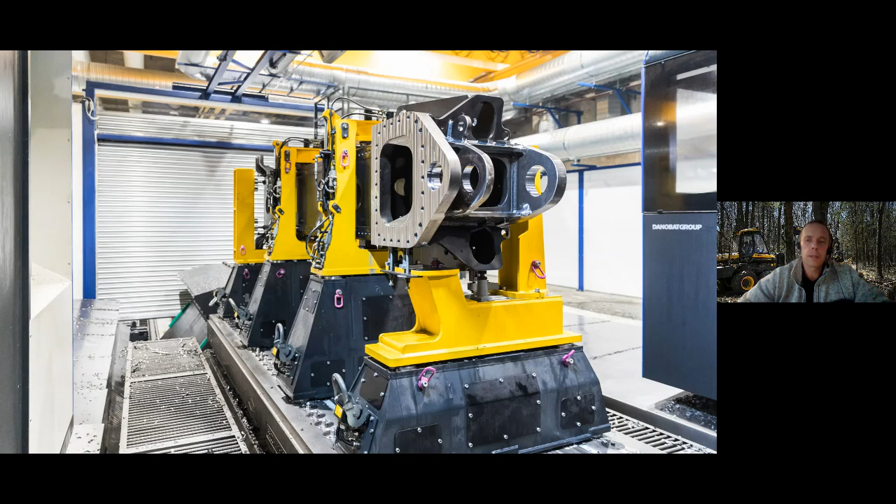Here are some pictures. Like I said, we do make a big part of the machine in-house, and for example all the frames of the machines, cranes, and harvester heads, these big parts of the machine we make ourselves. After robot welding, all these components are machined, so that the quality is extremely good for the customers' use in the world.

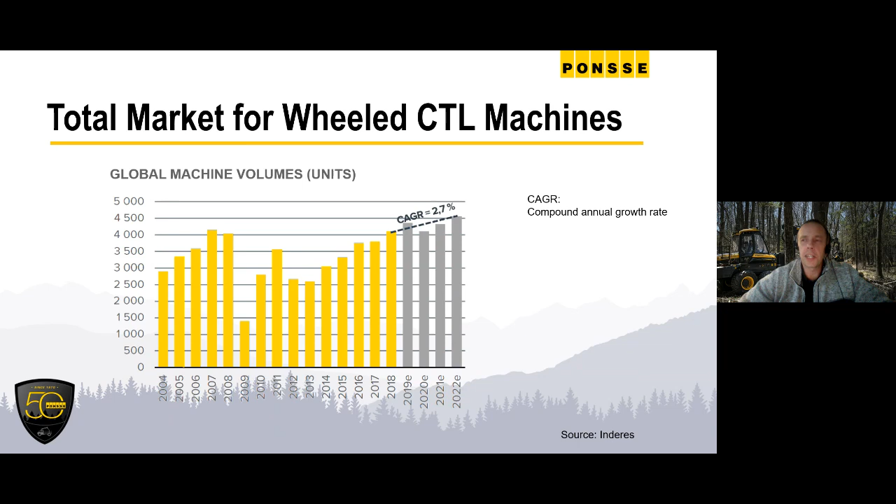Then a little bit about the cut to length machines and the market globally. Here's a little chart about how the volumes go, and we can see the trend has been that the total market for CTL machines has been growing, and we can see that trend also for the future. Of course this year we have a little gap, a little drop, because of this pandemic situation in the world. But overall we can see that these wheeled CTL machines are growing, and Mr. Antti Räsänen will soon tell a little bit more about why that is.

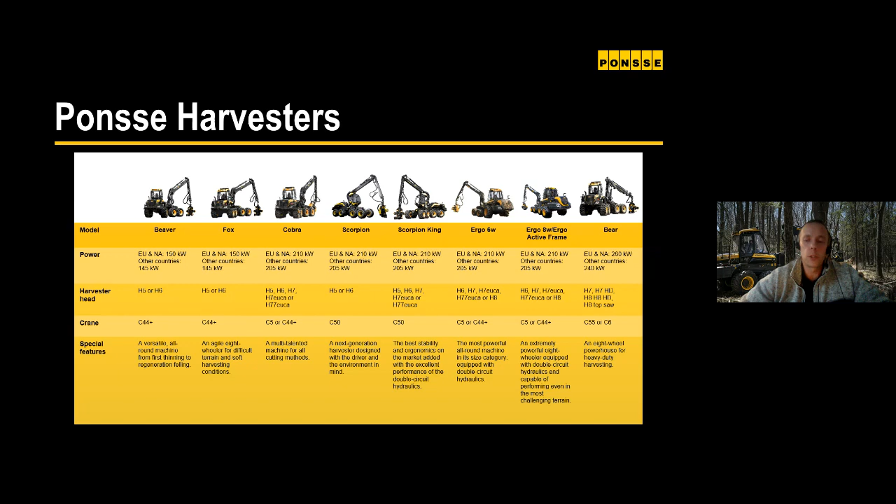I will not go through these too deeply, but just to give you an idea of what kind of products we have and are selling. From the harvester side, our product models start from the 6-wheel Beaver for thinning sites, all the way to the Bear harvester, the 8-wheel Bear harvester for the very demanding clear fellings. So we do have a very, very good product portfolio with the harvesters.

Same thing with the forwarders, so from the Wisent forwarder, the 12-ton forwarder, all the way to the 20-ton Elephant King, and also the Buffalo Dual is one of our products there.

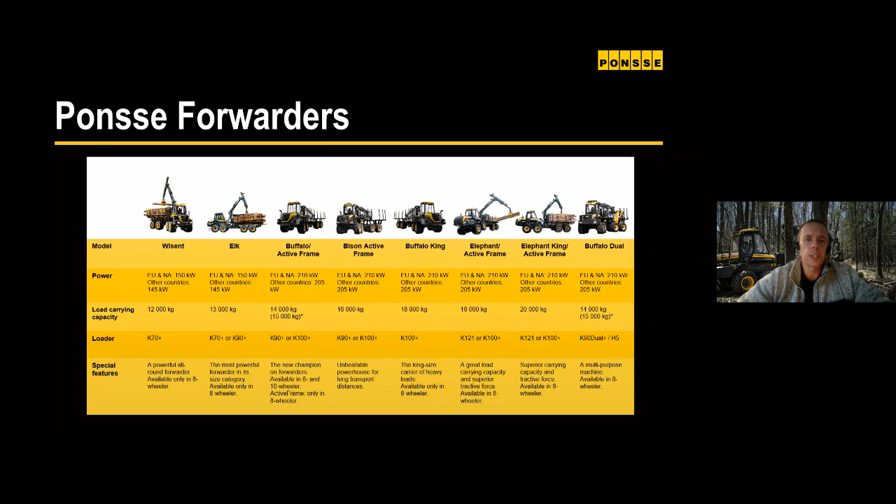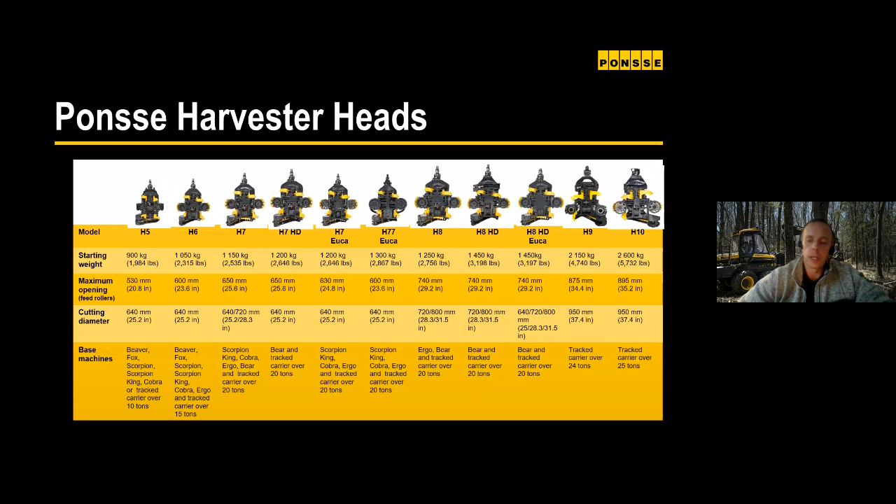Of course, a very important thing is that we don't only make the machines, we are also very strongly providing services, and these kinds of service agreements have been becoming more and more popular in the world in many markets during the last few years, and this is the trend. We want to still push forward with this, and our customers who have been selecting this Active Care service agreement have been very happy, because they can really be focused on the operation and production, and we take care of the rest.

This is what we really believe in, and we have been making the best forest machines in the world since 1970, and this is what we still want to continue doing very strongly together with our customers. This is our strong focus.

With these words, I would like to give the stage to Mr. Antti Räsänen, our training manager, who will talk more about the cut to length. So please, Antti, go ahead.

Thank you, Marko. I will share my presentation before I start.

So I hope everybody can see now the Ponsse CTL page. First of all, it's of course unfortunate that we cannot see face to face and have those good discussions we've had with many people, especially in North America during the years about the CTL, and it's been really exciting and interesting to see the development that's happened through the years.

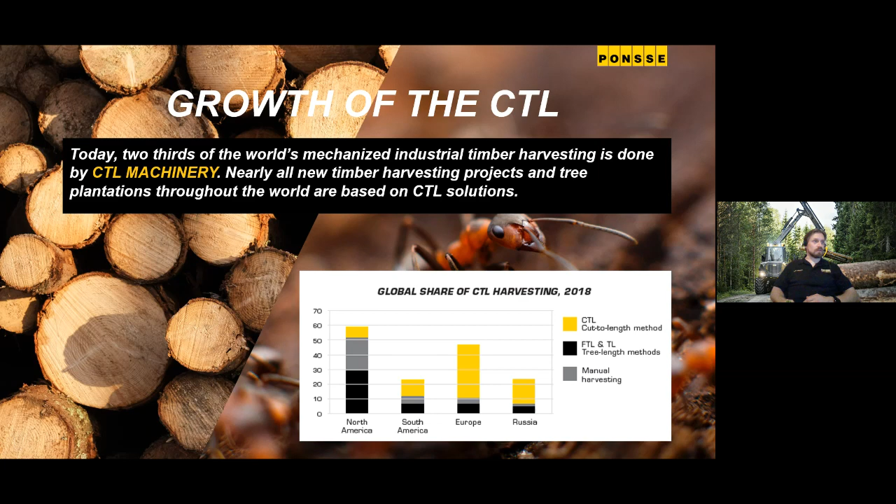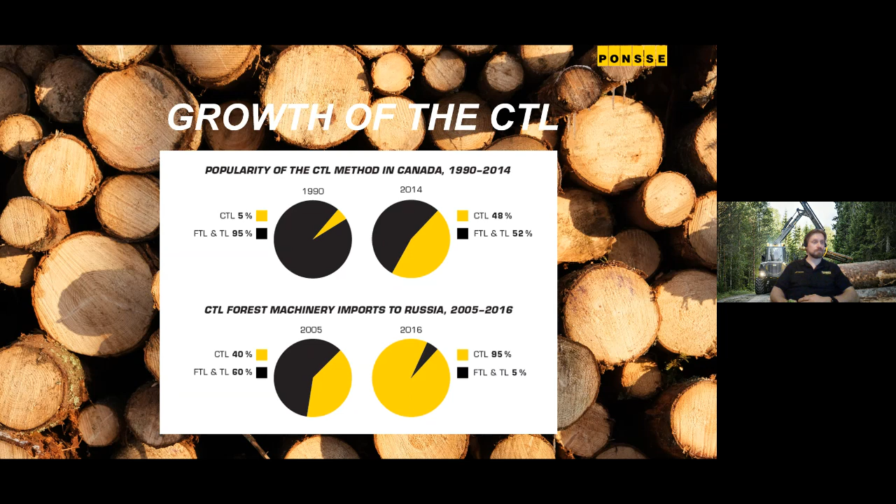But there are certain reasons why this has been happening and why so many companies, so many people have chosen to go to CTL. Briefly about the method: basically, the basic idea is that timber is processed in the forest according to the intended use. I think that's the core idea of CTL.

So right away, when we touch it the first time, we fell it and process it directly to the right products. Harvester goes in, it fells, delimbs, measures, optimizes and bucks, and this happens to every tree individually. We optimize what products should be taken out of this particular tree based on its species, size class and quality. This is probably the most important thing in the method in general, because that brings the best value for every single individual tree, and also the ability to control very closely what is being done.

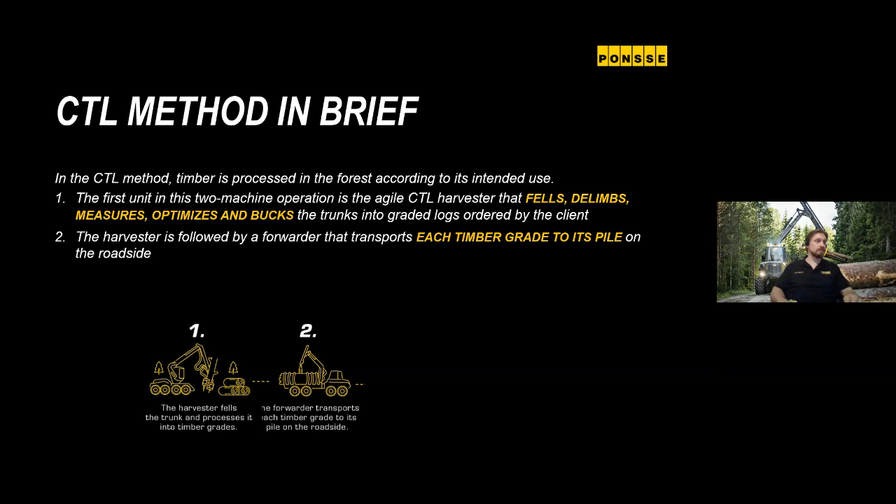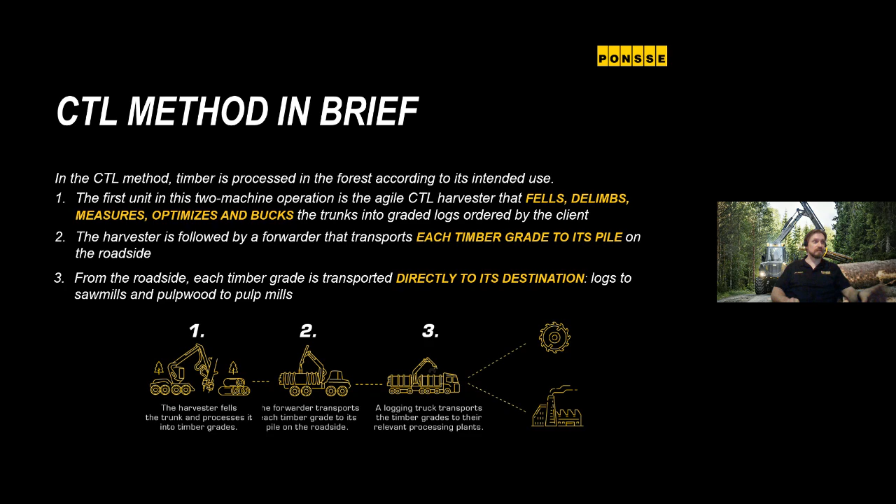Secondly, the harvester is followed by a forwarder that transports each timber grade, each product, to a separate pile on the roadside, on the landing site, or whatever you want to call it. Then trucks deliver the logs to different mills directly. So saw logs go to the sawmill, plywood logs go directly to the plywood mill, pulpwood goes to the pulp mill. There's typically no mixed loads unless it's necessary and needed. So basically everything is optimized all the way from the stump, when we fell the tree, when we touch it the first time with the machine. We touch it minimum times, we process it right away to the right qualities, right products, according to the market needs. That's the basic principle.

In the CTL machines, in the Ponsse machines, we have a quite sophisticated computer system. This doesn't mean that it's complicated for the user, it's actually quite easy, because the computer system is pre-programmed to do everything. It measures, it optimizes. So the operator basically moves the harvester head, fells and processes the trees, and follows the suggestions done by the computer. So it's quite simple, quite straightforward, but it still gives a possibility to control bucking really effectively and precisely.

You can of course do only one product also if that is a need, but the possibilities are there. So for example, in the beginning you might have only one, two, three products that you are making, but by time there's a need to and possibility to optimize your working and your production. So there's a lot of possibilities with CTL.

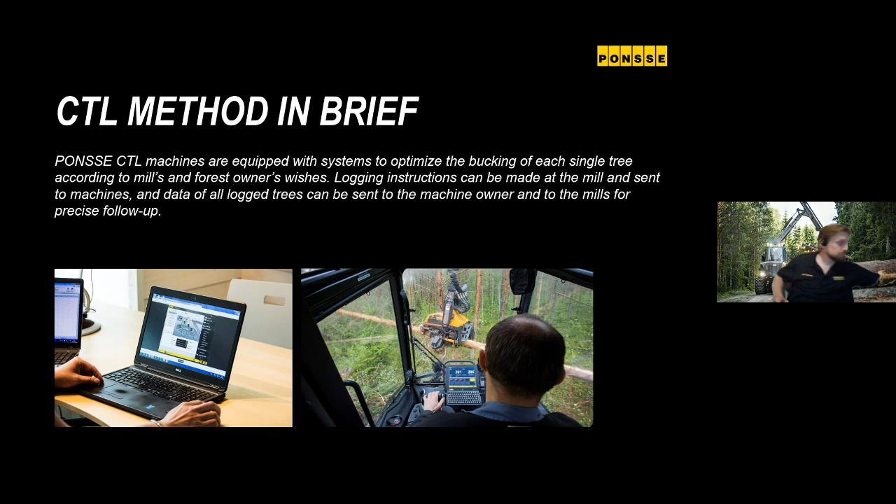And of course, all this gives the maximum value for both the raw material, but also for the work that you do in the forest. So we are optimizing the value of every single tree and every single movement of the machine, so to say. And of course, the main purpose, the final target, is to make more money out of the trees that we have available for the landowner, for the machine owner, and for the mills.

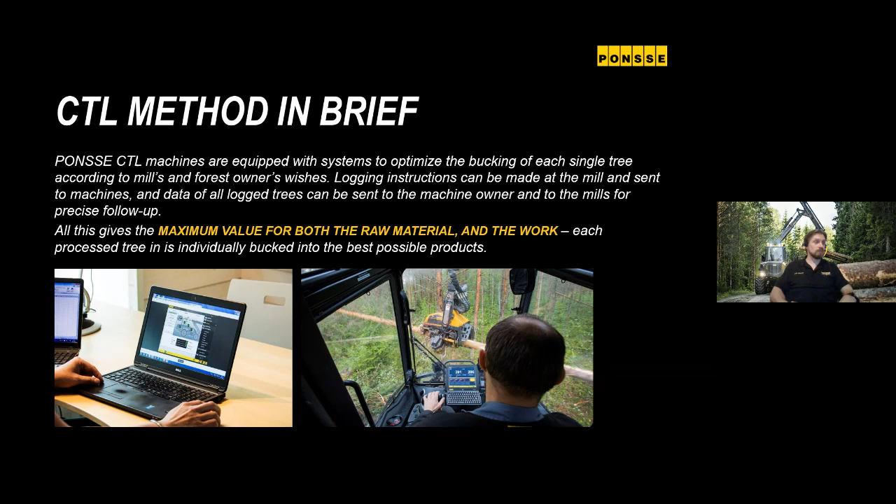One benefit of the CTL is that it's a secure method in terms of utilization rate. There's been calculations and studies done that to reach roughly similar production as one tree length method chain - feller buncher, skidder, and 2 processors - we typically use 2 chains of harvester and forwarder, 4 machines. The security of the method is that if one harvester stops, you still have the other one working, so the whole chain doesn't stop. If a feller buncher stops, everything stops. That's the difference in security and utilization rate of the 2 methods.

It's a cost-effective method also. Compared to tree length, we need a little bit fewer machines, significantly fewer people to run the operation, and significantly less fuel. Many people say the full tree or tree length method is much more effective - a feller buncher does a lot of work per hour, per day, per month, and a skidder pulls a lot of trees, especially in short distances. But if we compare, we can put an equal amount of machines and produce the same with CTL, still having all the benefits with the same production rate.

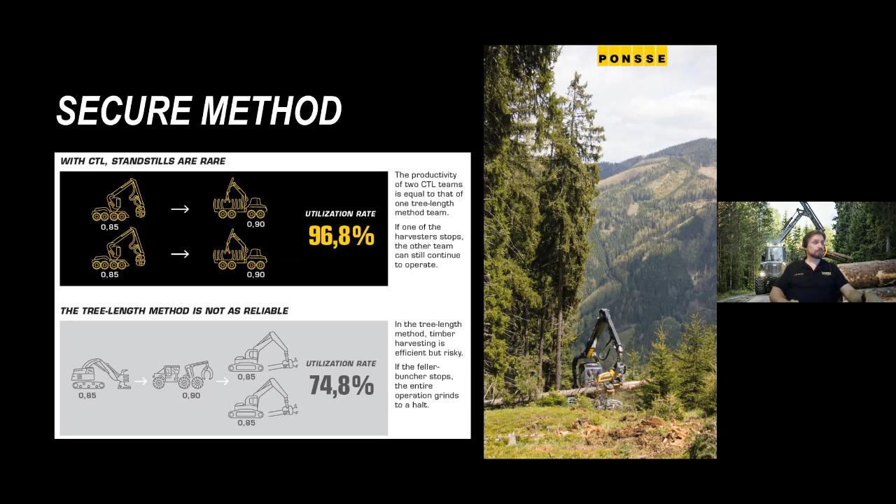It's also a safer way to work. I'd dare to say it's the safest method in the logging business. Forestry and harvesting is considered tough and dangerous work, and I think everybody accepts that. Manual logging is the most risky and dangerous, and there's still a lot of that happening in the world. But on the other end of the scale, there are CTL machines - really comfortable, driving relatively slowly, with air conditioning, a safe cabin with all the comforts possible. It's a really ergonomic, comfortable, and safe work environment. This has been changing as CTL progresses and grows in the world, and the amount of accidents has been decreasing through the years.

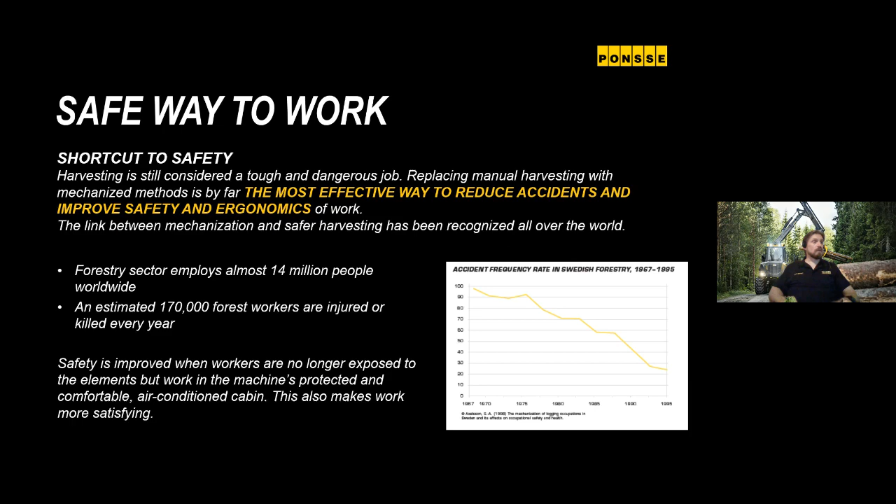One thing about CTL is that it's environmentally friendly, whether or not you're interested in this aspect. But in markets more and more throughout the world, this is an issue growing in importance - it's like a marketing factor, that it's a sustainably produced product, whatever it might be - sawn timber, paper, plywood, or energy wood.

We have benefits in CTL. One is that because of the thinning operation and the CTL process in general, even in clear cuts, the risk of forest fire is lower. In well-managed forest, we are thinning them, taking away dead wood and bad quality wood, and making it less dense. All this lowers the risk of forest fire.

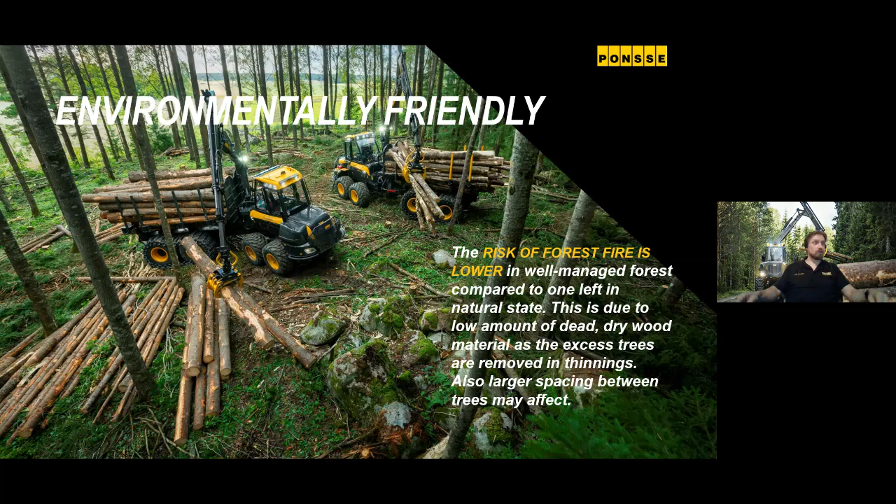Another thing is that when we process trees in the forest, we delimb them and take the tops off. We leave the nutrients - the leaves, needles, limbs, tops - in the forest, so they become nutrients for the new growth of the remaining forest or the next generation.

Also, the CTL method eliminates overlap and unnecessary steps. Like I said earlier, we are optimizing everything - the utilization of the raw material, the work itself. Every step we take has a purpose, as effective as it can possibly be. That's obviously an environmental issue, but it's also an economic issue.

I already mentioned comfort - a really super comfortable office for the operator is what we have in the Ponsse machines. We've actually done a couple of big projects over the past 10 years or so developing the best possible working environment for the operator - starting with all the interiors of the cabin, location of switches and controls, the joystick design, how everything works, visibility, stability of the machine, and so on. There's a lot that affects comfort and ergonomics for the operator, and that's also really important for the economics, because when you have an operator who doesn't get tired, who stays fresh and focused for the day, he produces better quality and more timber every single day.

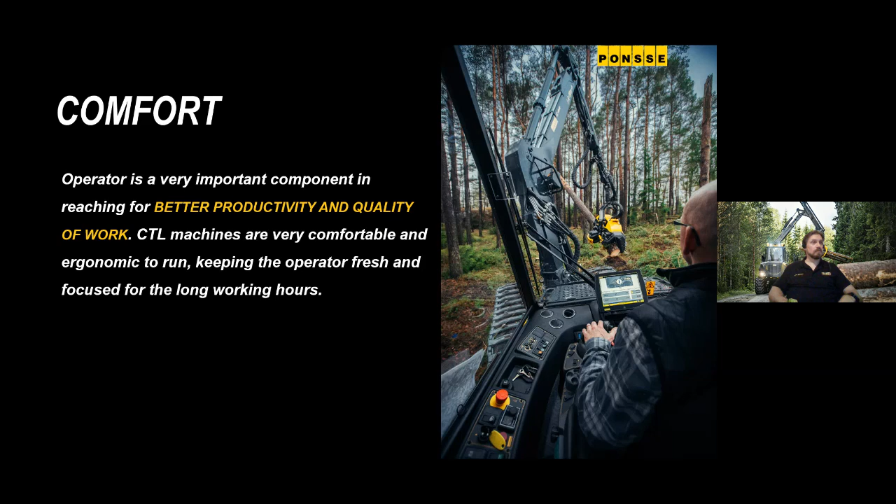Control systems, computer systems, like I mentioned, it's really carefree. The operator doesn't have to be a computer scientist to learn to use it. It's really straightforward, just a couple of clicks and you're doing the job. Spacious cabins with air conditioning and the most ergonomic control joysticks in the market. So when the operator has a good, ergonomic, comfortable environment, he's motivated and he's productive and he does a good job. That's the basic line of it.

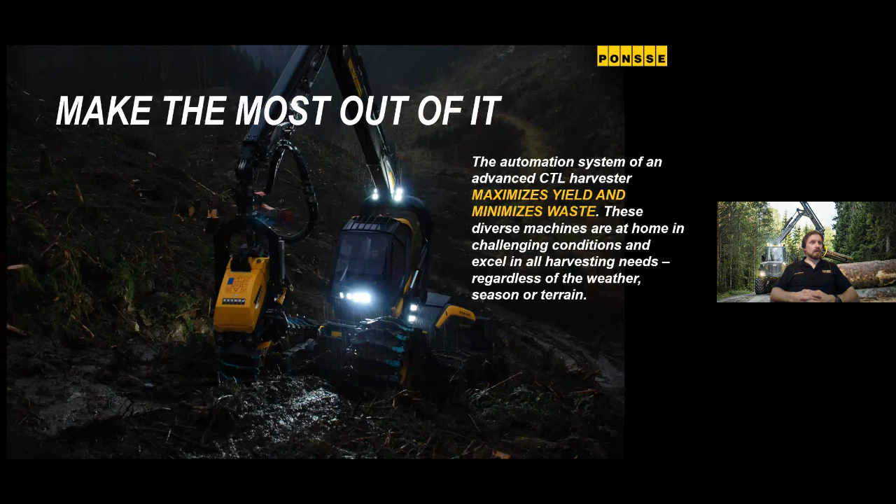Make the most out of it. We have really high developed automation systems in harvesters, also in forwarders. So one big benefit is that we are maximizing the yield of the wood and minimizing the waste. We can actually even utilize the branches and treetops. I will show a picture later about biomass harvesting. So you can take pretty much everything, if you like, effectively.

The machines are really suitable for many different kinds of applications. You can go to hills, mountains, soft grounds, wet areas, no matter what kind of weather or season or terrain you have. It's always effective and you can work.

And then one big benefit and difference is that CTL enables high quality forest management through selective thinning. And this is important. With the thinning, when you do it the right way, you can significantly increase profitability of the forest management. You can grow more trees, you can grow higher quality trees, bigger trees. And actually you can also get some money in the middle of the growth cycle. When you do the thinning, you get some timber out of there.

So selective thinning, that's a big possibility in many kinds of environments. One thing is plantation forests, where you plant the trees quite densely, and then the growth is really poor unless you do the thinning in the right and timely manner. Then you get better growth, you get higher quality timber, more frequent income, and also reduced fire risk.

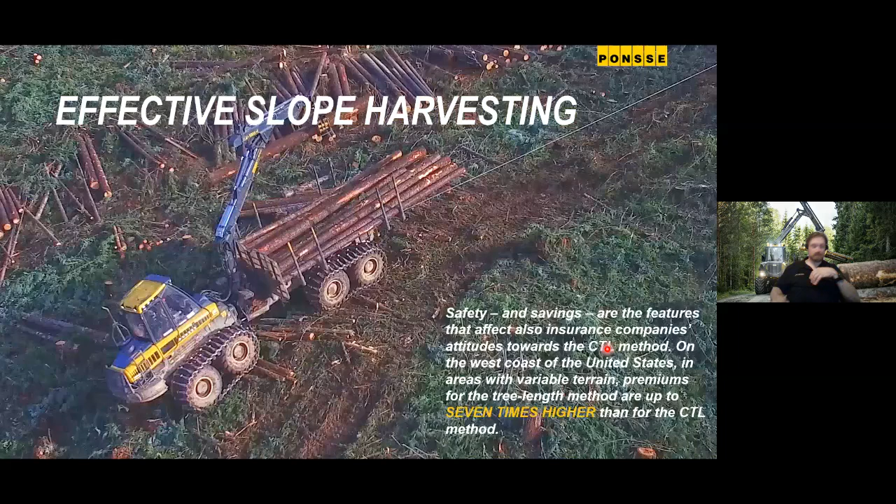I've heard that on the west coast of the US, in areas with variable terrain, the insurance cost for the tree length method might be 7 times higher than CTL, because of the safety and steadiness of the equipment and the work. That's obviously a huge difference and benefit.

Soft, wet, snowy, sensitive, you name it, we got it. There's of course the selection of the machine model, size, class, type, but typically it's 8 wheels and you can fit different kinds of tracks.

For example, in this picture is a high flotation track. It's pretty much like excavator tracks, and it's gained really big popularity here in Scandinavia because we have a lot of soft lands, wet peatlands, and there you need high flotation for the machines. This is one option, one solution to that kind of need.

You can go to very soft, very wet areas and still do very effective logging. And again, with the same machine, you can go to hard, solid ground, steep hills, deep snow. If needed, you can change the tracks to different kinds of models, but that's all.

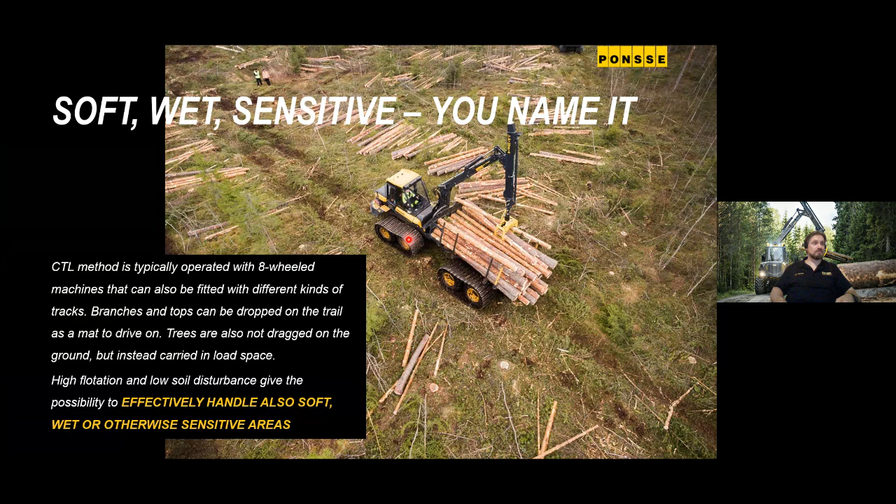And then biomass, like I mentioned, the same equipment can be effectively used for recovering biomass. It might be at the same time you're producing sawn timber, pulpwood, and also collecting branches and tops, or it can be a separate worksite where you have small trees that you collect for bioenergy. You can do all that with the same machine, and again go to slopes, soft grounds, wherever you need with the same equipment.

There is certain optional equipment you can use for biomass extraction. For example, variable load space, where you can extend the bunks to both sides to have more capacity, more space in the load area for the biomass, because it's lighter in weight than normal logs. You can have a specific grapple for biomass, but you can also work with the normal log grapple. It's not a problem.

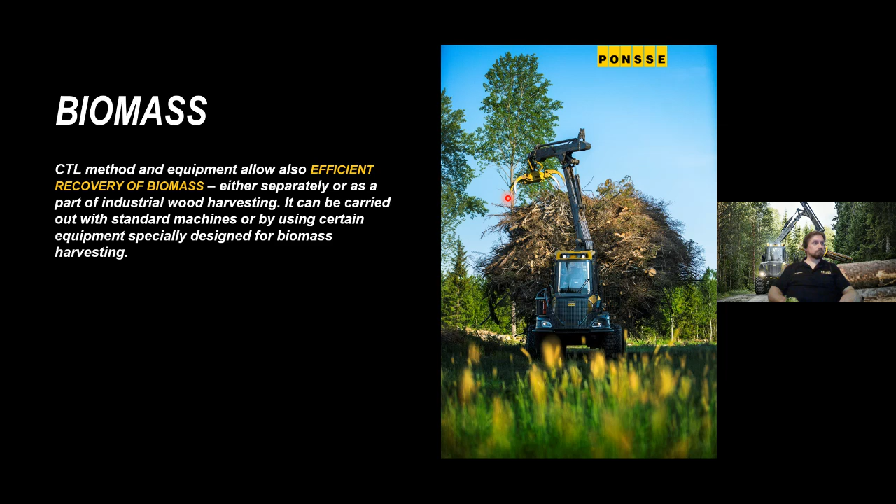And then there's even further special adaptations. We have a 10-wheel option for forwarder for extremely soft ground. So we have 3 wheels on both sides under the rear frame, under the load space, and then put suitable high flotation tracks. Basically you can go to softer land than where a man can walk. And that's a proven fact.

There's been cases where a guy jumps out of the cabin and sinks more than knee deep in the swamp, while the machine is still floating nicely on top.

Another option, we have a factory option for a clam bunk for some special applications, where you can pull out full trees from the forest again with the same machine, with a cut-to-length machine. You can switch back to normal forwarder load space and then put this big clam bunk in. Actually that's a really effective way, especially on longer hauling distances compared to a normal skidder, because with the clam bunk forwarder, you can haul really huge loads of logs at the same time.

So it takes a little bit more time to load it. You're loading it with the grapple, with a loader, but the capacity, the carrying capacity is very big. So that gives you a big advantage on longer distances.

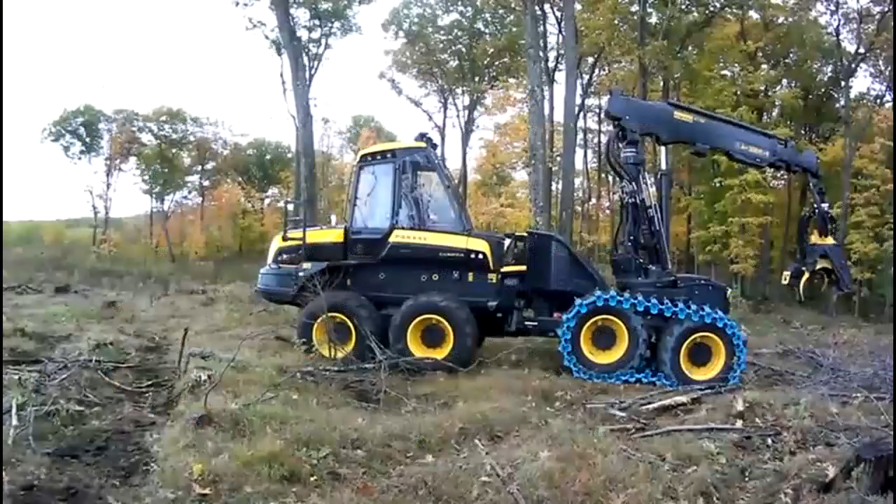Okay, so that's about the presentation and the CTL theory. I think we might start to watch the machines working. We have a live demo, but with this COVID situation, obviously through video streaming.

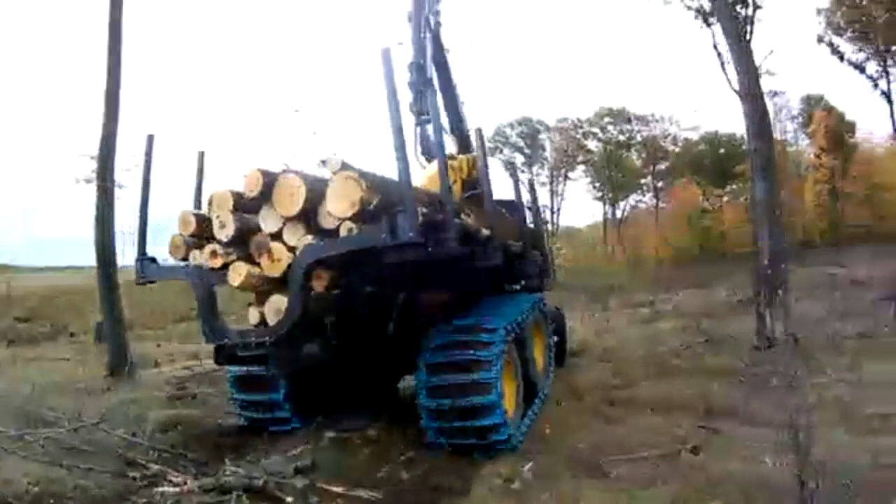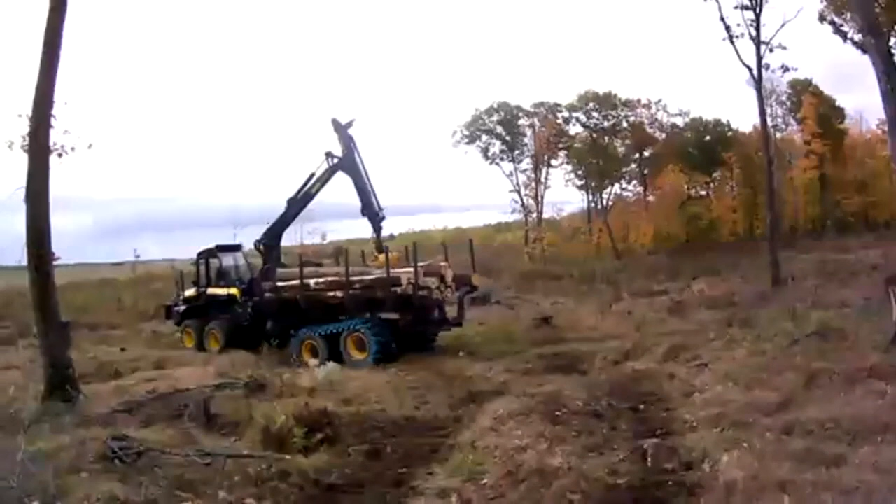This is a mixed hardwood job site. It's been thinned earlier, and it's actually owned by the local airport, so they're clearing it for the approach way. It's been raining 3 days in this area, so it's really wet, really soft. But as you can see, there's no problem with these machines. 8 wheels, suitable tracks, and they work just nicely.

The Cobra, the harvester that was working earlier, that's actually available at the Rhinelander shop. The Cobra is the latest harvester model, introduced a couple of years ago. Really good all-round harvester for various purposes.

If you have really heavy work, big heavy trees, hardwood and so on, then Ergo is a good choice. It has a lot of power, big output. But if it's not extreme, then Cobra is a really good, safe choice. Really effective machine, big work pump, 210 cc work pump, a lot of oil flow. So really good choice. And structure and basic layout is basically like an Ergo, so everybody knows the technology and it's really good. Also resale value, we can expect that it's really good, there's good demand for it all over the world after years also.

And then the Bison, the forwarder that you saw a minute ago, that's really a special machine. That's totally new technology. I would say that's like a Scorpion of forwarders in a way, if you know the Scorpion harvester that we introduced in 2013. This is the same kind of difference, same kind of leap in technology for forwarders.

So instead of the normal hydrostatic driveline that is used in forest machines, in the Bison we are using a CVT transmission, continuously variable transmission. It's a mix of hydrostatic and mechanic drive transmission in one gearbox with a varying gear ratio, and the majority of the power is transmitted by a mechanic gear system rather than the hydrostatic.